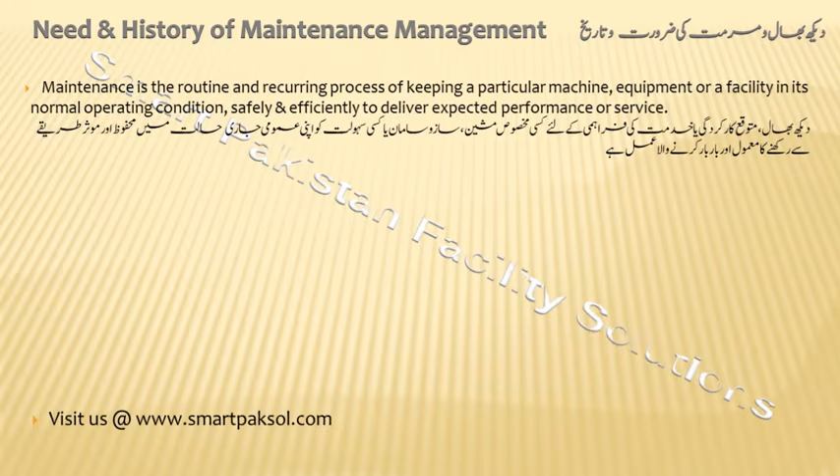and details. Now discussion is, need and history of maintenance management. Maintenance is the routine and recurring process of keeping a particular machine, equipment, or a facility in its normal, operating condition, safely and efficiently to deliver expected performance or service. With the growth of industrialization and automation, the machines and equipment are more complex, which started a separate discipline of engineering asset and facility maintenance management.

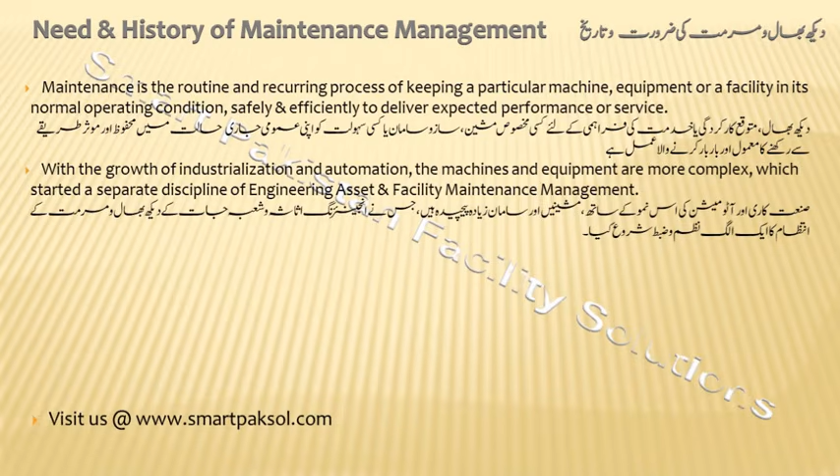Heating, ventilation, and air conditioning system, design, and its maintenance of any typical facility is also a major concern, as it is the same as lungs for the human body. It cleans air, recirculates, and ventilates according to need.

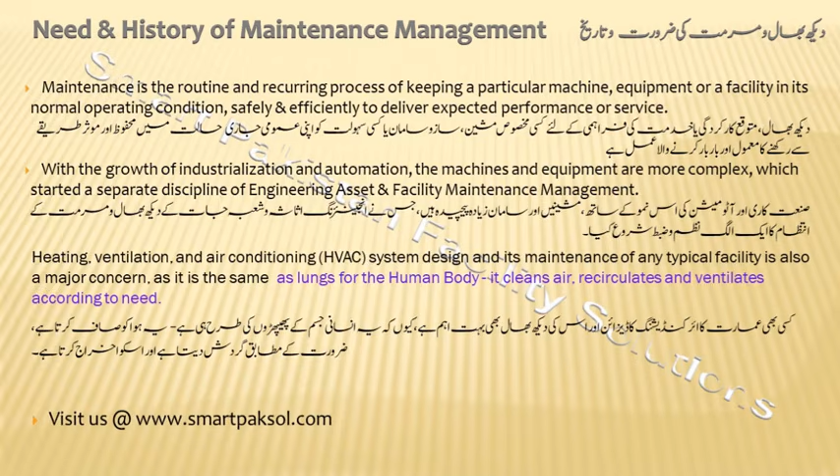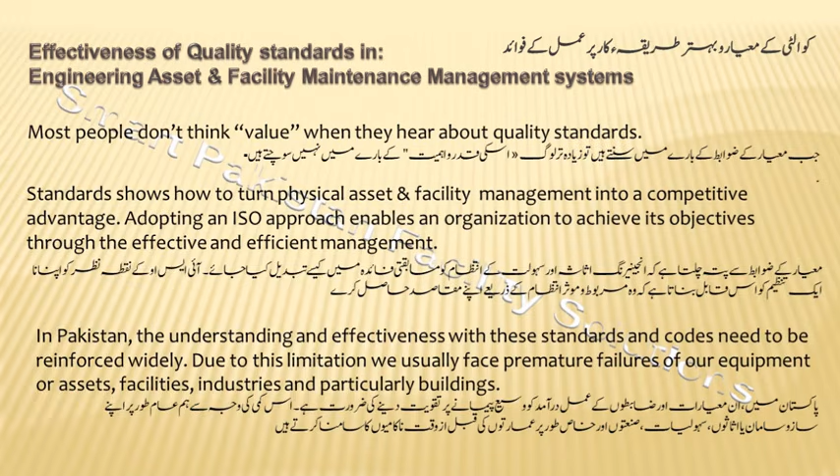Now we discuss the effectiveness of quality standards. Most people don't think value when they hear about quality standards. Standards show how to turn physical asset and facility management into a competitive advantage. Adopting an ISO approach enables an organization to achieve its objectives through effective and efficient management. In Pakistan, the understanding and effectiveness with these standards and codes need to be reinforced widely. Due to this limitation, we usually face premature failures of our equipment or assets, facilities, industries, and particularly buildings.

Most organizations have no need to get ISO 55000 or 41000 certification. Certification is not the goal. What ISO 55000 or 41000 offers is a proven method for managing physical assets in a way that maximizes hard and soft dollar, or Pak rupee, value. It's not about getting certified or achieving compliance. It's about aligning your organization with globally accepted recommendations for asset or facility management excellence.

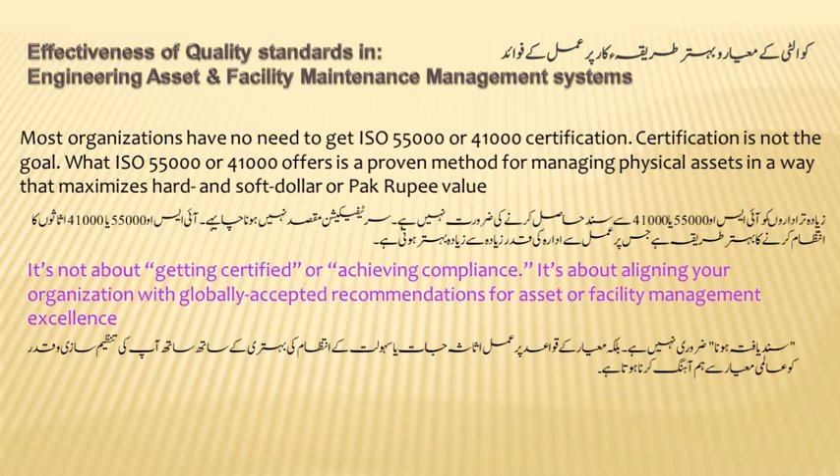Brief introduction of ISO quality standards. Guiding principle defines management responsibility. Leadership and workplace culture are determinants of realization of value. Leadership and commitment from all managerial levels is essential for the success.

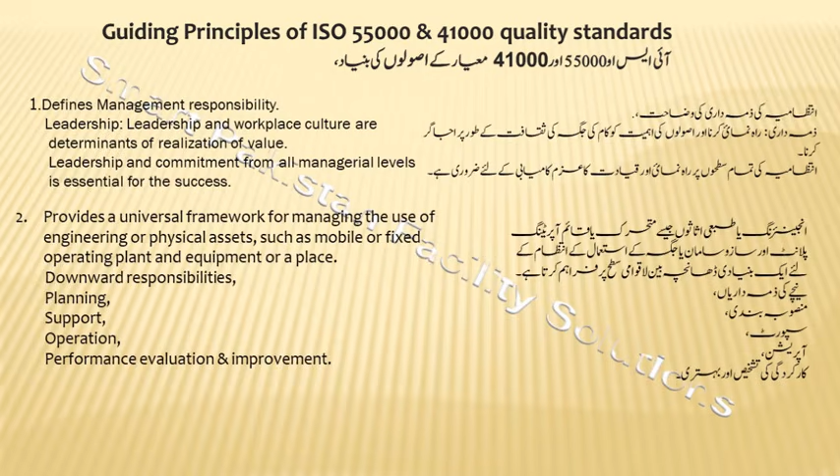Provides a universal framework for managing the use of engineering or physical assets, such as mobile or fixed operating plant and equipment or a place. Downward responsibilities: planning, support, operation, performance evaluation and improvement.

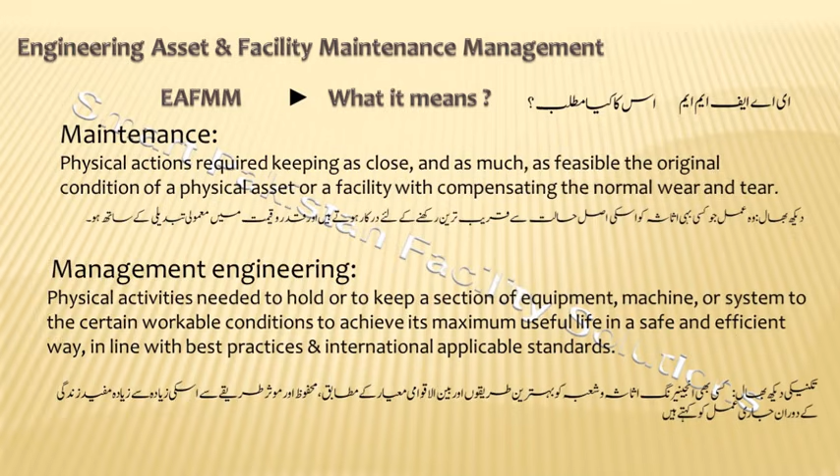Here is about maintenance engineering. Maintenance is the physical actions required to keep as close and as much as feasible the original condition of a physical asset or a facility, compensating the normal wear and tear. Physical activities needed to hold or to keep a section of equipment, machine, or system to certain workable conditions, to achieve its maximum useful life in a safe and efficient way, in line with best practices and international applicable standards, is the maintenance engineering.

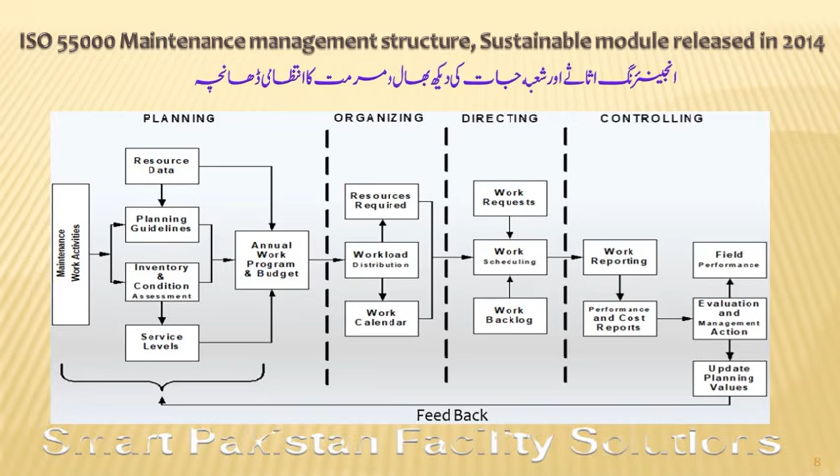In conclusion of this discussion, here is the sustainable module of maintenance management structure of ISO 55000 or 41000, covering all aspects: planning, organizing, directing, and controlling. Feedback from controlling to planning is a continuous quality improvement process.

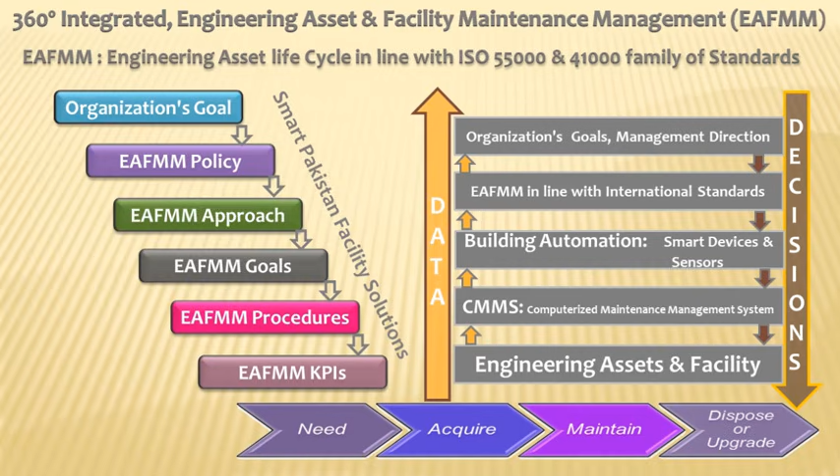Another view of engineering assets and facility maintenance management, in line with ISO or relevant quality standard, steps starting from organization's goal, management directions, then policies, procedures, finally key performance indicators. Data is the resource for decisions, supported by building automation and computerized maintenance management system.

This is the life cycle of any engineering asset or facility, starts from need, then acquire, maintain, at the end its upgrade or disposal decision.

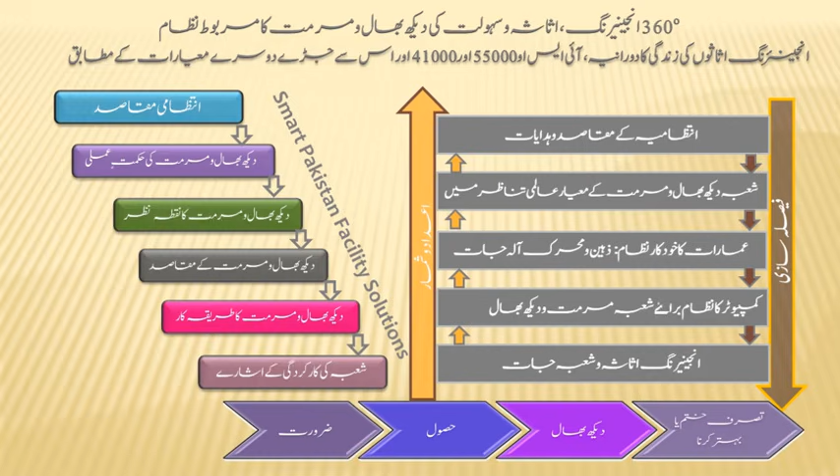Improper policy or any missing procedure of the EAFMM system can cause serious consequences and turns into disasters. Don't let this happen to you.

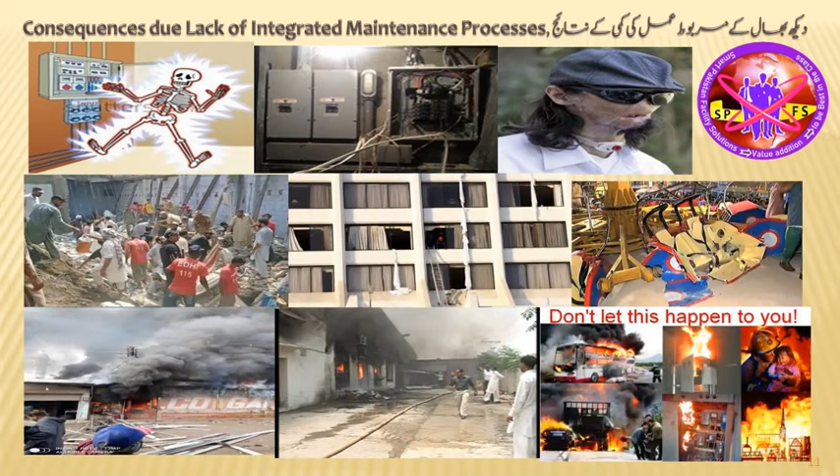You watched in this video about EAFMM basic structure. Give your feedback about this video in comments.